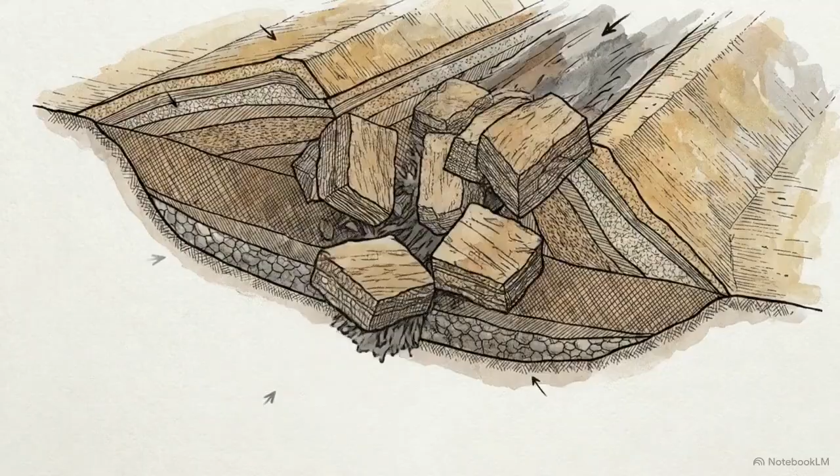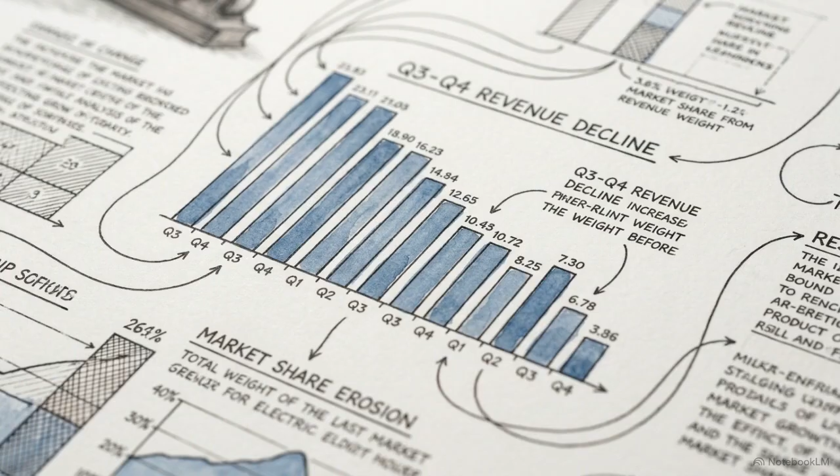Corporate sustainability marketing often focuses on high-level commitments, but the engineering reality of heavy industry is that a single operational failure can result in immediate asset destruction and billions in lost enterprise value. A report highlighting a 5% reduction in global water use provides no insight into the actual risk profile of a capital-intensive project. Without asset-level data, these aggregated totals are financially uninterpretable.

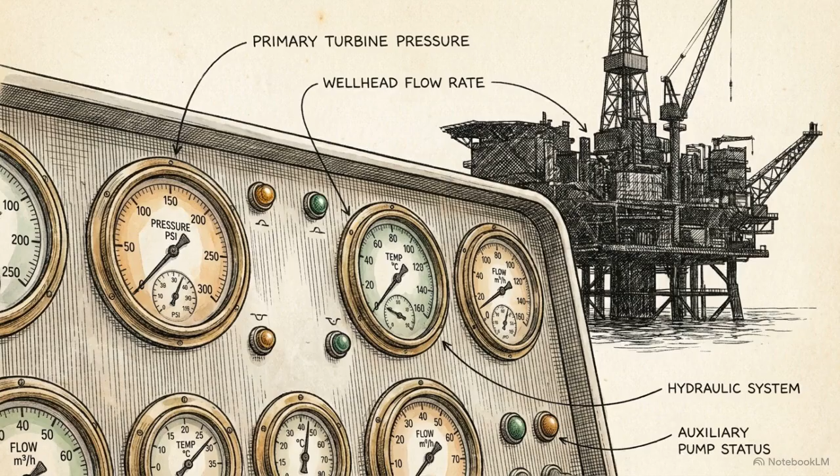In heavy industry, environmental and social metrics serve as lead indicators for the quality of management's operational discipline. We are using the SASB framework to translate physical events, like methane venting or clinker calcination, into the specific data points required for financial modeling. For the extractive sector, ESG data functions as operational telemetry that reveals the true condition of the underlying business.

Understanding this risk begins with defining the physical boundary of the industrial asset. This coal operation involves a terraced open pit spanning several square kilometers. Production depends on moving millions of tons of overburden using 300-ton haul trucks.

In contrast, cement production relies on stationary, interconnected infrastructure. The core is the rotating kiln, where raw materials chemically transform under constant, extreme heat. While these engineering models differ, their respective physical risks must be standardized to fit the corporate income statement and balance sheet. Accurately pricing financial exposure is impossible without first identifying the distinct physical constraints of each asset class.

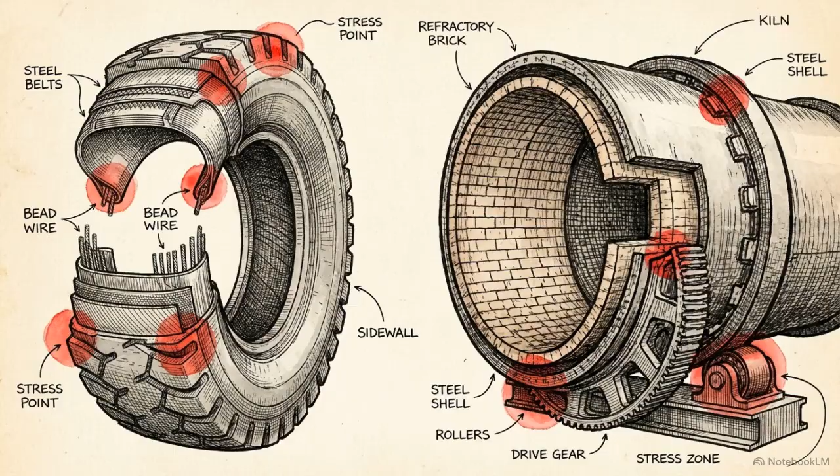Industry-specific scoping is the mandatory starting point because the business model determines how every subsequent data point is valued. A coal operation's risk profile shifts based on its product, thermal coal for power or metallurgical coal for steel, and its extraction method, whether it is a surface pit or a deep underground mine. These variables dictate long-term demand visibility, extraction costs per ton, and specific regulatory hurdles.

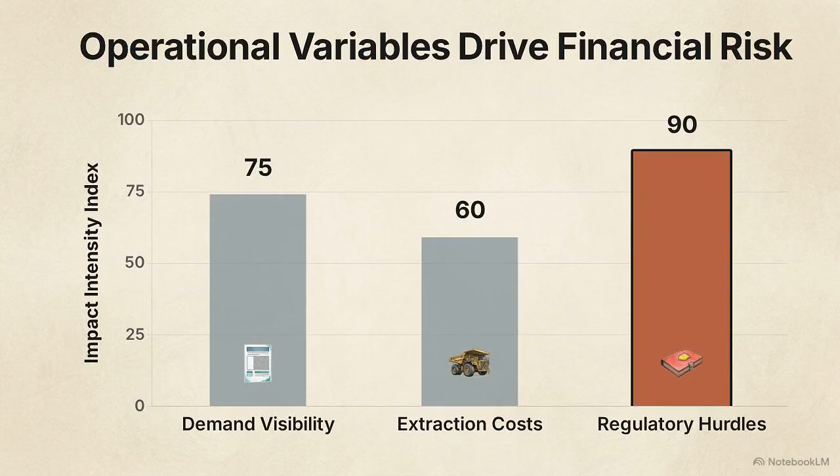In the construction materials sector, an aggregates operation is defined by localized extraction. Profitability here is driven by proximity to demand centers and the management of a high acreage land footprint. This model relies on local logistics and permit stability.

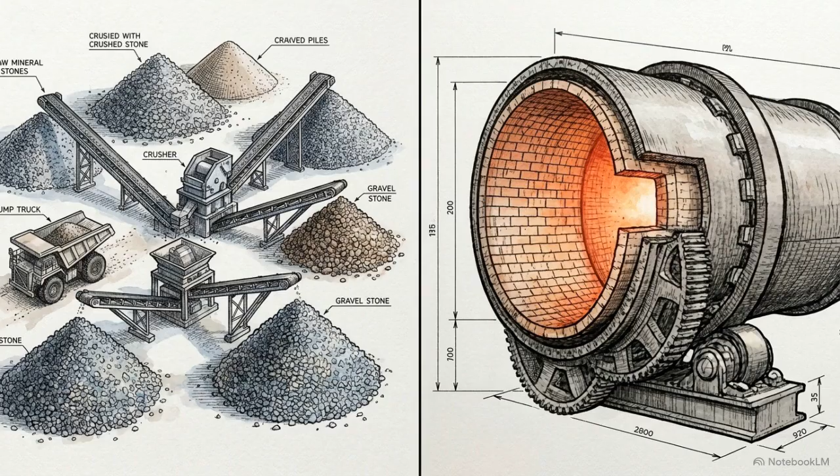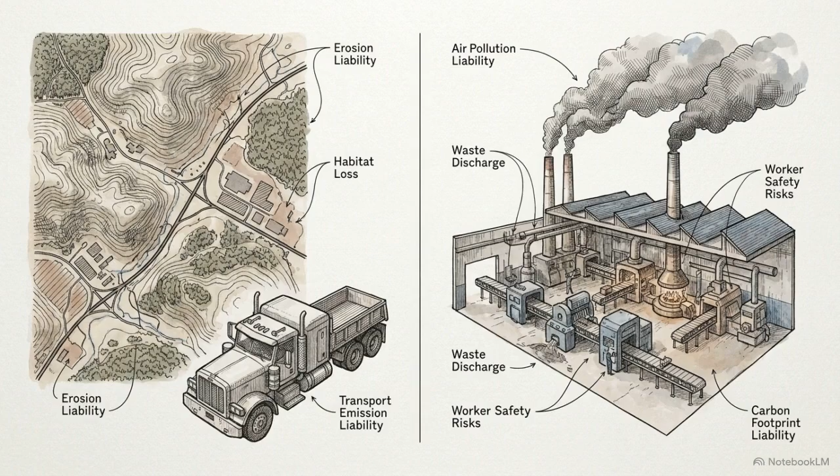It contrasts with the cement model, where the primary driver is the operational efficiency and fuel mix of high-heat kiln infrastructure. A portfolio dominated by aggregate quarries carries different land use and transport liabilities than a portfolio focused on cement manufacturing. Using a generic cross-industry framework fails to distinguish these asset-level differences, leaving investors unable to identify where primary risks reside.

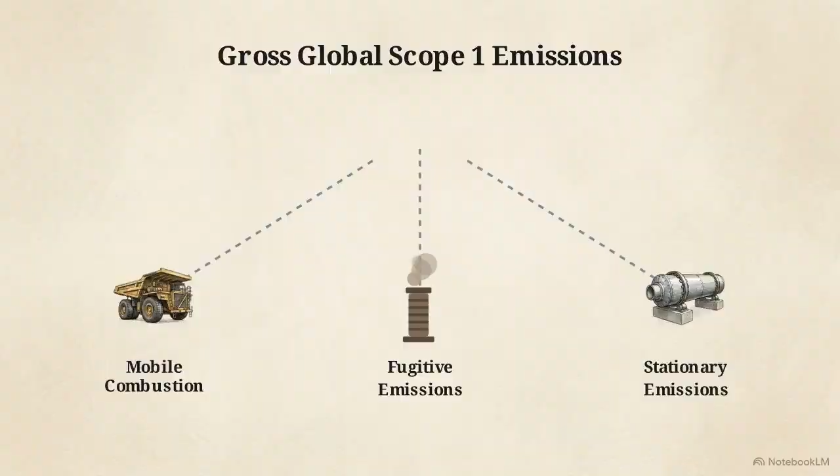Greenhouse gas metrics provide a clear example. A total Scope 1 emissions figure is only useful if an investor can pinpoint the physical process generating the carbon. In underground coal mines, the primary emissions source is often methane released directly from the coal seams and removed via ventilation systems. This methane represents both a climate policy exposure and a safety hazard. Managing it requires dedicated capital investment in gas drainage and monitoring to prevent underground ignition.

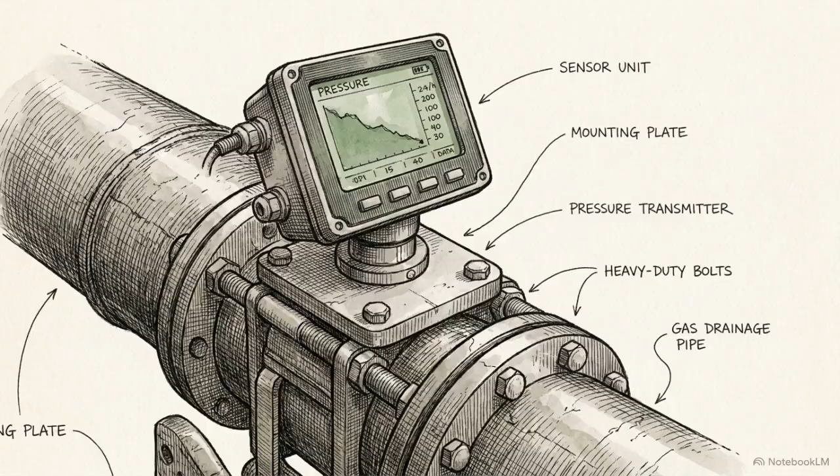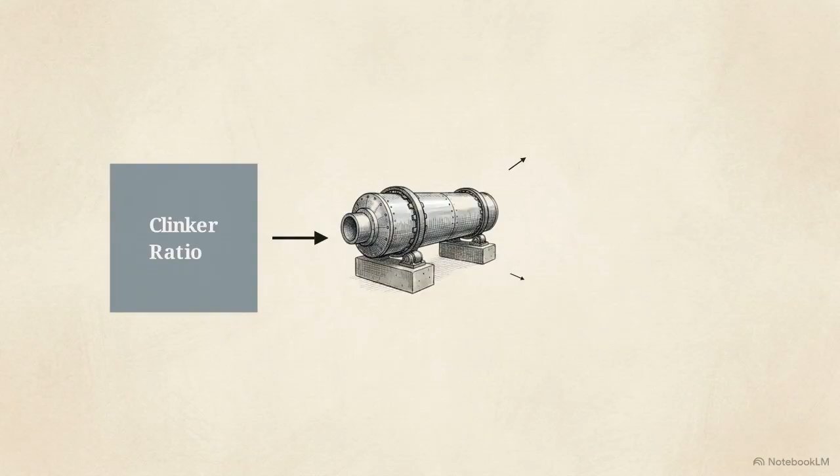Cement production faces a different mechanical constraint, clinker calcination. Inside the kiln, temperatures must exceed 1400 degrees Celsius to initiate the necessary chemical transformation. This diagram splits the kiln's output. One stream is fuel combustion. A larger stream is process emissions, carbon dioxide released by limestone heated into clinker.

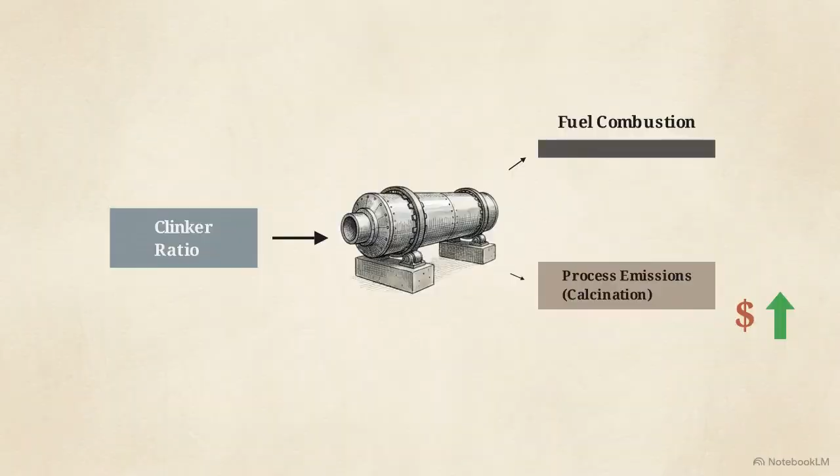Lowering the clinker ratio reduces these process emissions, directly lowering the company's per-ton liability under carbon pricing. Investors must understand the physical source of an emission to judge if management's mitigation strategy is technically and economically feasible.

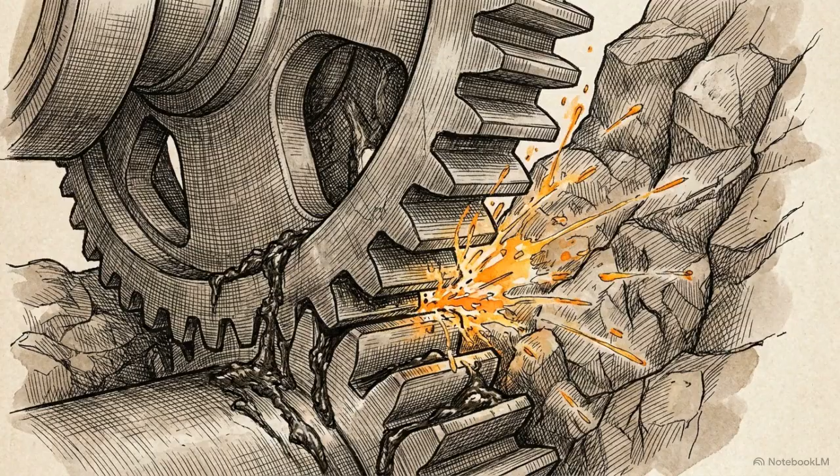While carbon pricing affects the long-term margin, localized friction points determine daily production continuity. A global water consumption figure often obscures the most significant risks. SASB requires companies to disclose the percentage of water withdrawn, specifically in regions with high or extremely high baseline water stress. Operations in these regions face higher competition with local communities and agriculture, increasing the likelihood of permit revocations and drought-related shutdowns.

Industrial waste must also be categorized by its consequence. Standard operational waste carries a different risk profile than large-scale physical liabilities. This tailings storage facility is an engineered dam storing liquid mineral waste, creating a permanent downstream consequence zone.

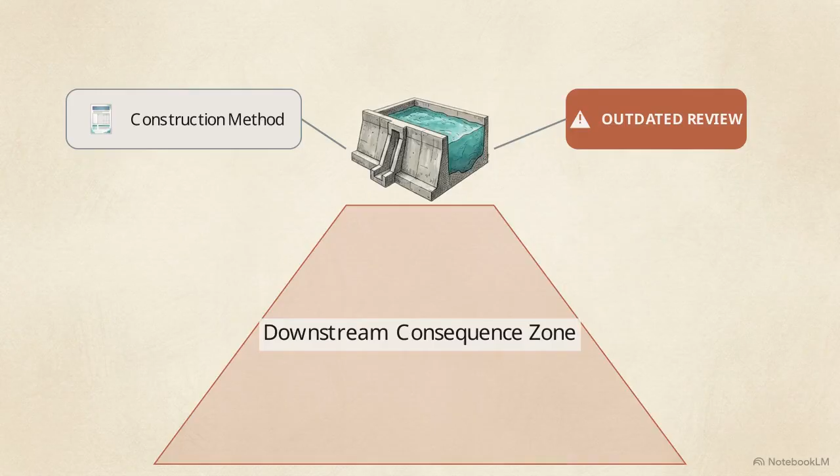SASB requires asset-level data like construction method and latest independent technical review dates. An outdated review at high-consequence facilities indicates a gap in risk governance. Safety performance is a direct measure of site discipline.

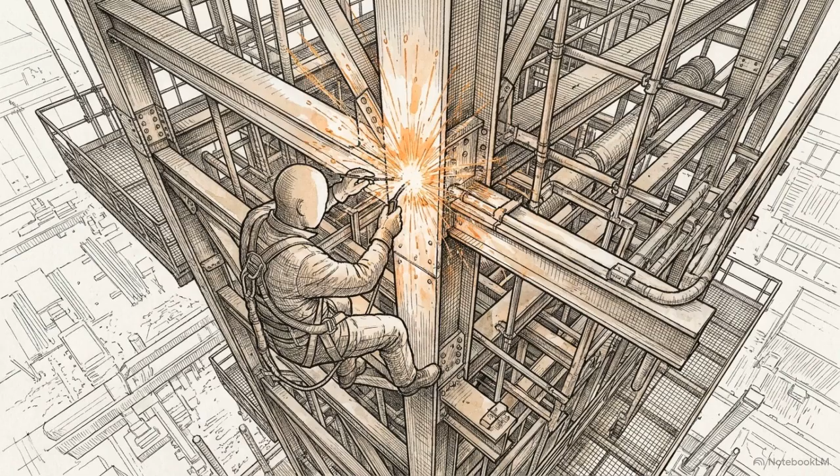When calculating incident rates, companies must include contract workers. Because contractors often perform high-risk maintenance and construction, excluding them from the data produces an incomplete view of the actual site risk. We also look for long-latency health risks. In minerals processing, this includes cases of silicosis caused by the inhalation of respirable crystalline silica dust.

Localized constraints, water stress, tailings governance, and contractor safety are the primary indicators of potential legal and operational liabilities. These operational data points eventually dictate the shape of future financial statements.

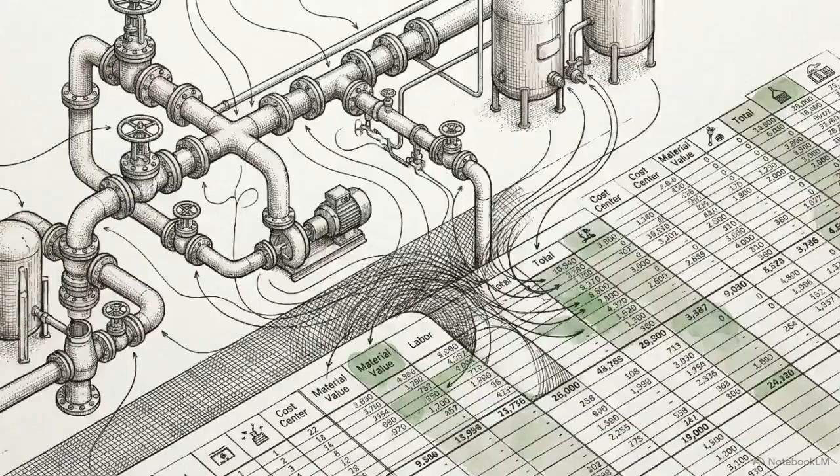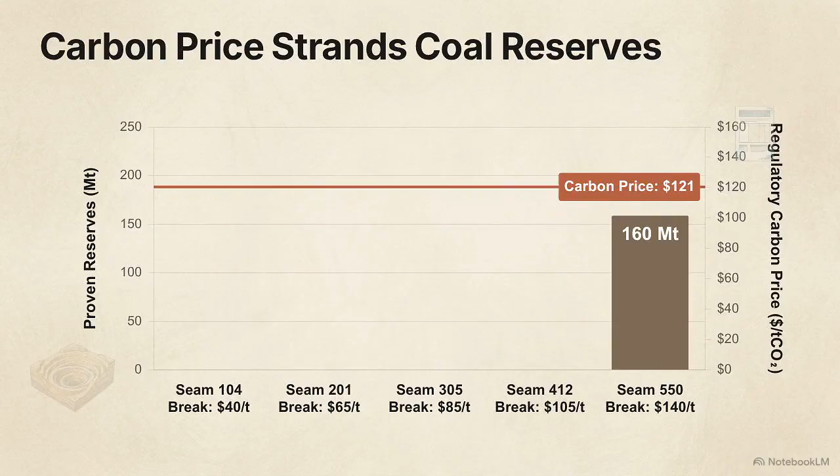This chart displays proven coal reserves overlaid with rising carbon prices. As carbon prices increase, extraction costs rise. When total cost exceeds market price, high-cost seams become economically unviable and must be removed from the reserve base. In the extractive sector, proven reserves are economic quantities that fluctuate based on price forecasts and regulatory assumptions.

This leads to the assessment of capital expenditure, or CapEx, strategy. A company's CapEx allocation reveals management's actual strategy, providing a clear comparison against their public sustainability commitments. Capital spent on reducing fatal risks or improving water recycling protects the long-term viability of the asset. Conversely, expanding production in carbon-intensive assets without a mitigation plan increases the risk of those investments becoming stranded.

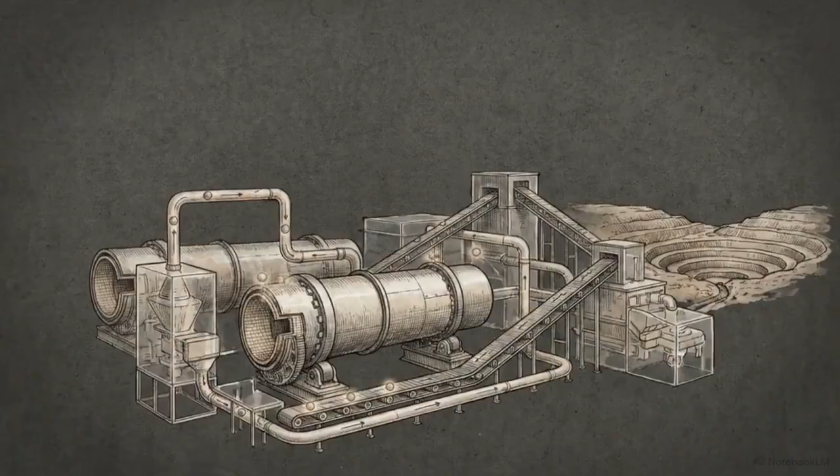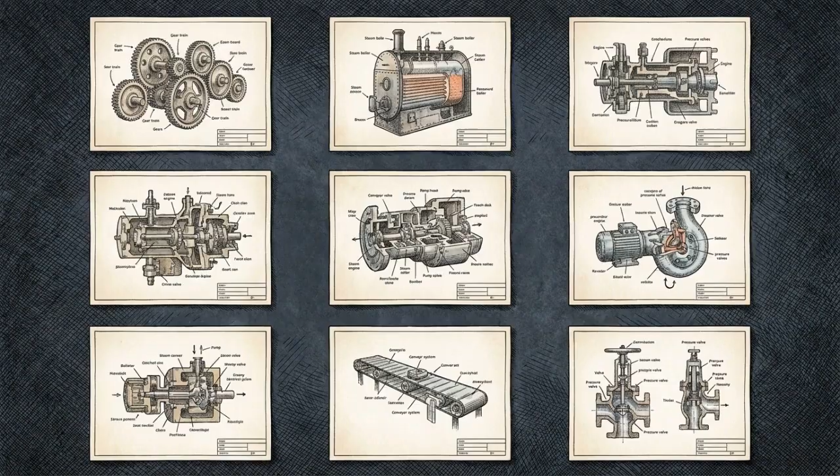CapEx allocation is the evidence that shows whether management is successfully aligning their physical operations with the changing regulatory and market landscape. We have integrated the physical engineering models, the operational data nodes, and the financial forecasts into a single logical system. The SASB framework focuses on the disclosure of disciplined, comparable truths about how a company manages its most material constraints.

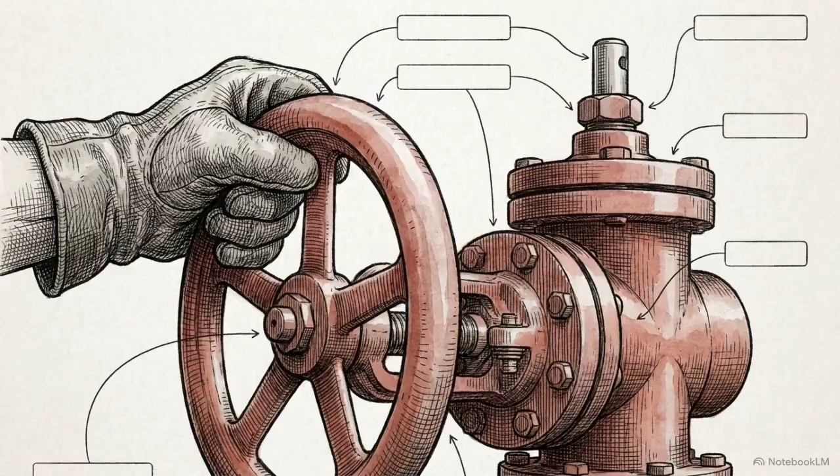High-level narrative statements lack value without quantitative metrics, just as raw numbers require operational context to be useful to an analyst. A professional disclosure clarifies exactly which physical asset drives the metric, what controls manage the risk, and how capital is ultimately allocated.

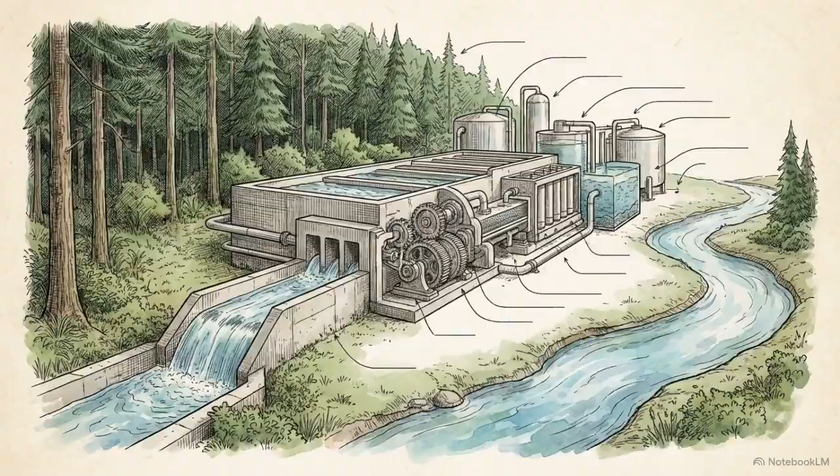Standardizing this operational telemetry allows extractive companies to provide an auditable account of how they protect their license to operate. By utilizing industry-specific standards, investors obtain a direct view of the risks that actually affect asset value. In capital-intensive industries, operational ESG performance is a primary determinant of the stability and resilience of future cash flows.